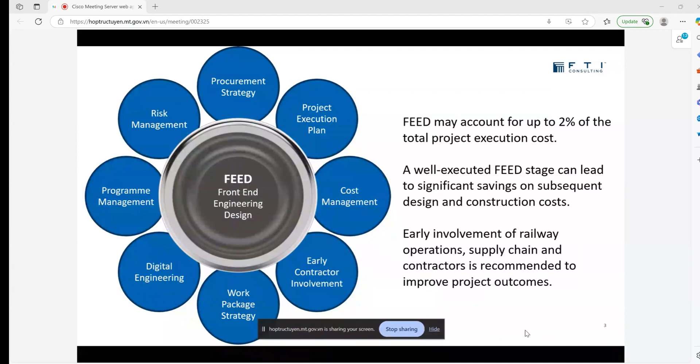One of the things I want to focus on in my presentation, apart from the early contractor involvement, the project planning, the cost management, is specifically digital engineering. And digital engineering, I think there are 4 things that you should be considering as part of FEED.

So under digital engineering, the most important thing you can consider at the beginning of the project is how you're going to collect the information to actually manage the facility and manage the railway in the future. Being able to understand and map out all of the asset information requirements, all of the facility management data, all of the operational data is going to be absolutely crucial.

So in the next 12 months, as part of FEED, this should be a priority for the authority to understand how we're going to manage digital engineering and how we're going to collect asset data throughout the life of the project, from design through construction and then handover to operations.

And what this looks like in very simple terms is that this process of establishing the asset information model begins at the beginning of the design process. So the data is collected throughout the design. Most of the data is collected during the construction phase, and all of that data needs to be gathered in a manner that can be handed over to the operator in the form of an asset information model.

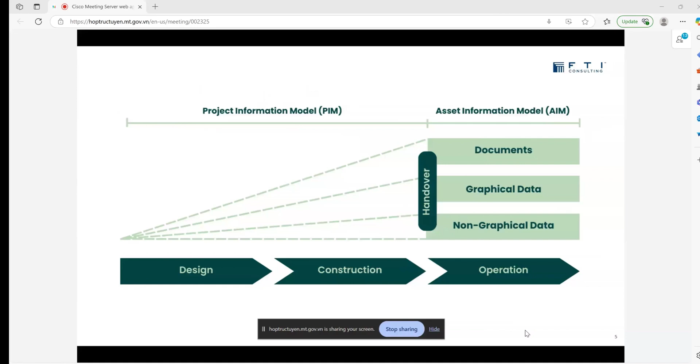So during the design and construction stage, you will hear people talking about BIM. Sometimes you hear them talking about PIM. You hear them talking about common data environments. These are all different ways of collecting information, but ultimately the operational information has to be collected by the high-speed rail authority. So one of the ways of doing this, and one of the things that needs to be considered as part of this process at FEED, is establishing a classification system for the data.

So in order to do that, you need to understand all of the different assets that are in your system. You've got your rolling stock, you've got your stations, you're going to have your tracks, you're going to have all the communication systems—many assets, thousands and thousands of assets. These must be classified and categorized so that you can actually find and manage the data. So one example I'm going to share with you is how we manage this for an underground metro project.

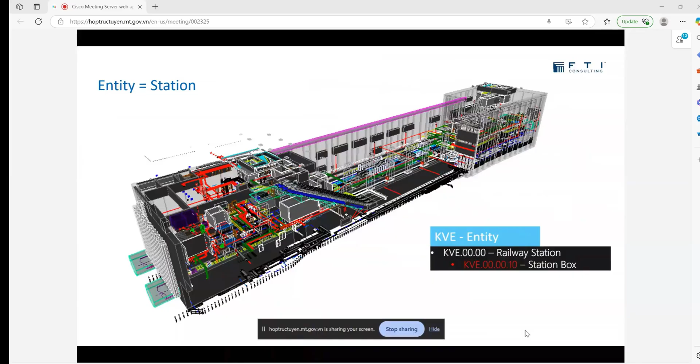The logic still applies to high-speed rail. You basically are going to have a number of entities—they could be stations, crossovers, bridges, tunnels—and each is going to be identified by a certain code. And then inside that entity, you're going to have spaces or volumes, and all of that information needs to be categorized and classified so that you can find assets based on their location.

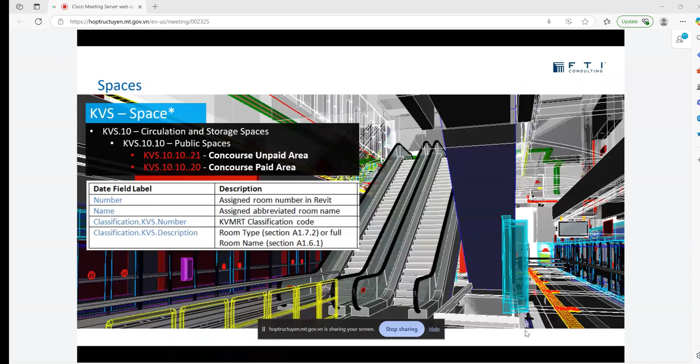Everything on a 1,500-kilometer railway will be based on location. So all the locations need to be defined, classified, and coded, and then you can start to understand where the assets are that you have to maintain and operate. And then inside those assets, or inside those buildings, you're going to find systems.

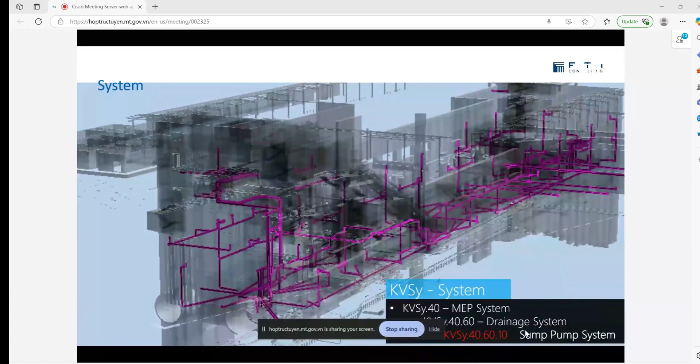You're going to have different types of systems - railway systems, building systems, drainage systems, fire systems. Each system is made up of many components, and inside those systems, those components are going to be labeled and created as products. It could be a fan, it could be a pump.

As part of the planning for the high-speed rail, it is absolutely essential that this data structure is planned out, and that is not left up to design consultants or contractors to figure it out as they go forward. It is absolutely critical that the owner defines all of these information requirements. We're quite happy to support you in developing those standards and requirements, but the owner is responsible for developing their operational requirements and making information mandatory for consultants and contractors to actually deliver. That's the first part of the puzzle - establishing the owner's information requirements for their asset management.

What you will all be familiar with is BIM, or you'll at least have heard the term BIM. For many of you, it may just be a 3D model. For many of us that have done it before, it's the backbone for all of the information that will be gathered. So we look at BIM across a number of different key constraints.

In order to get BIM correct on your projects, it is essential that the High Speed Rail Authority defines what they want from the BIM process. So we can make sure that designers and contractors are meeting your digital engineering requirements, and we can make sure that audits are completed, so we can actually develop a really good practical BIM roadmap. There are 5 key areas that need to be considered.

3D modeling is going to be the most important at the beginning, making sure that all of the alignments are modeled, all the bridges are modeled, all the crossovers are modeled, etc., etc.

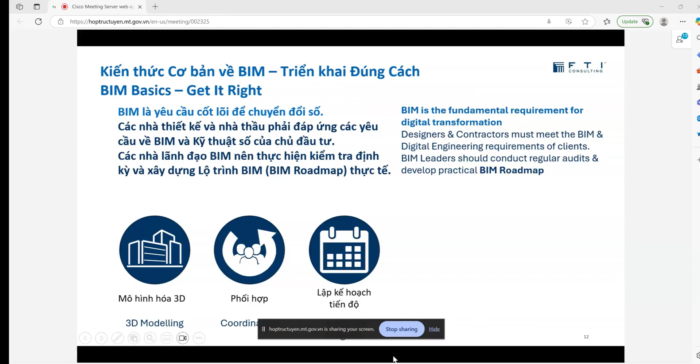You can then start to use the models for scheduling, and you can also use the models for quantification. By building good quality models and establishing the requirements that they'd be used for scheduling and quantities, you can start to manage the project, manage your costs, manage your planning, and manage your program. These are tasks that can be assigned to consultants or EPC contractors, but it is driven by the owner's requirements that the models are used and built upon all of this.

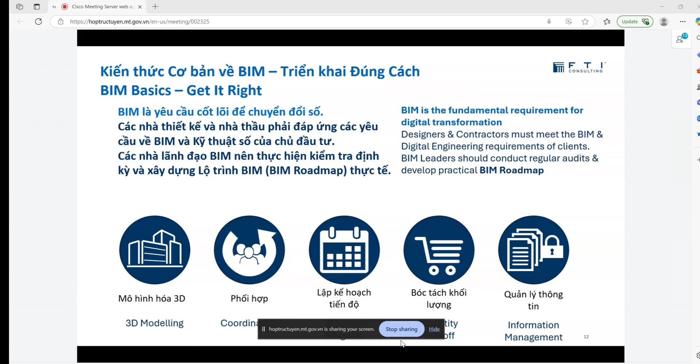Ultimately it comes down to information management. How do you collect the information that you're going to use to run your facility in the future? It's not just about the design and construction phase - it is also fundamentally about the data you're going to collect so you can actually run and manage the facility in the future.

During that FEED process, in order to come up with your BIM plan, you need to start considering who will be involved in the project team at different phases of the project - during the design phase, what skills, what talent, what capability is required during construction, during commissioning, during handover. All of the different phases of the projects need to be considered and to a certain extent planned out.

The roles and responsibilities need to be considered between the different teams - between the owner's team, the design team, the construction team, the supply chain, etc. Absolutely critical is setting up the communication, collaboration, and coordination procedures, and this can be supported with technology - common data environments, cloud solutions. The method by which information is shared is important.

The uses for BIM on the project can be defined - you can have a light touch or a very substantial touch. There are a number of really, really good examples of how BIM is being used for high-speed rail. HS2 has had some success stories. We had a good HSR project in Malaysia, which had good requirements for BIM. So there are a number of existing documents that clearly specify how BIM can be used, and above all else, the authority can lean on and start to apply international standards.

There are good standards around ISO 19650 for information standards and asset management, and many guidelines are available. So the information is available, and it's up to the authority to follow it through. A couple of lessons learned from the projects, and what you can expect going forward.

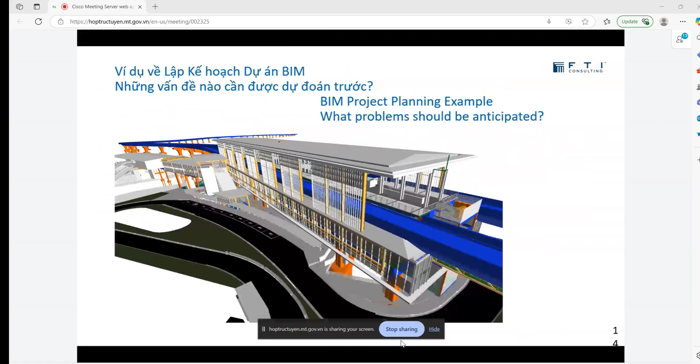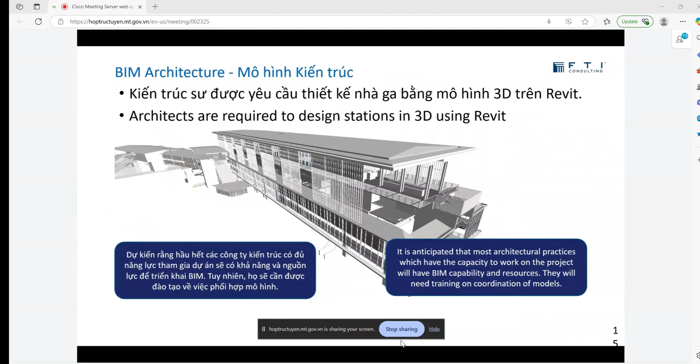This is an elevated train system we worked on in Malaysia. You can assume the architects will be able to work in 3D—it's not unusual for architects to work in 3D anyway. So they'll have the ability to do the models, but they won't be experienced in coordinating train or railway systems, and not many architects have worked on high-speed rail. So the architects will require training and support when it comes to coordination, particularly with the engineering teams.

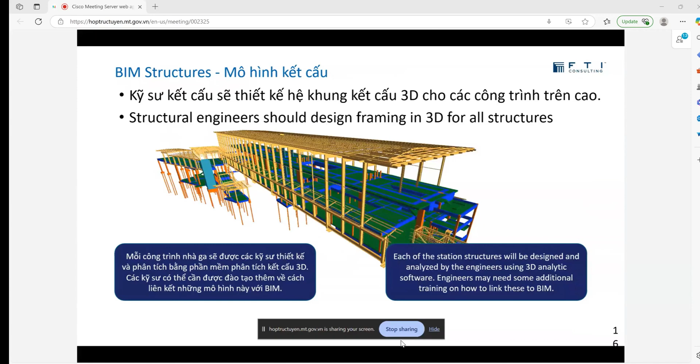When you get to the engineering teams, again, it's normal for engineers to work in 3D, so you can expect a good quality of service from the structural engineers—less so from the civil engineers. So when you actually get to doing the viaduct layouts, the embankments, the bridges, you're going to need to provide a bit more support and a bit more training.

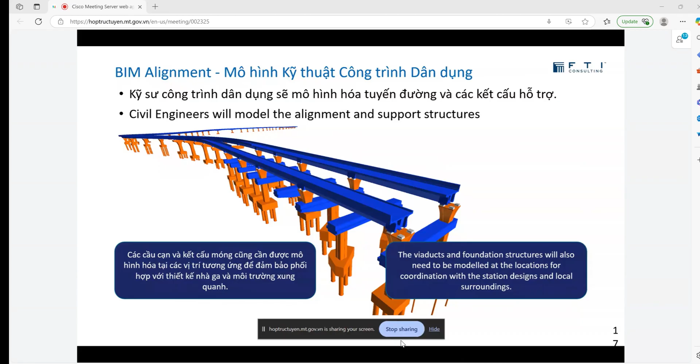The way this has been done on projects globally is they've established academies where they've trained up the local engineers and local staff to use these tools. We can help you with mapping out the academy. It's a small investment with a huge return—by upskilling the industry, you can start to get value from the process.

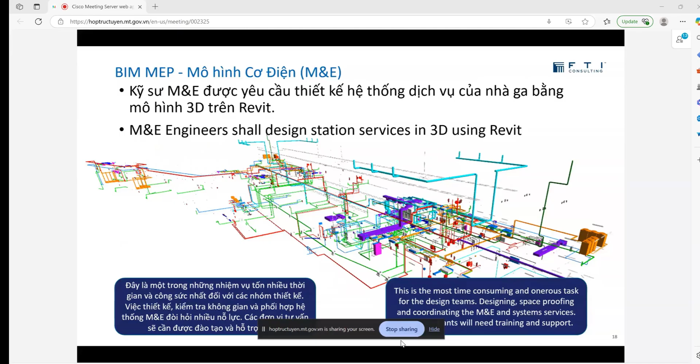The biggest challenge on all of these projects will be the systems—railway systems, mechanical systems, electrical systems. They involve a lot of complexity and coordination. This is where most of the effort will be required in actually resolving and sorting out coordination issues. Once you start to put all these systems together, you can expect to identify coordination issues, buildability issues, cost issues. So relying on the models as a means for planning and assessing the project is going to be absolutely crucial.

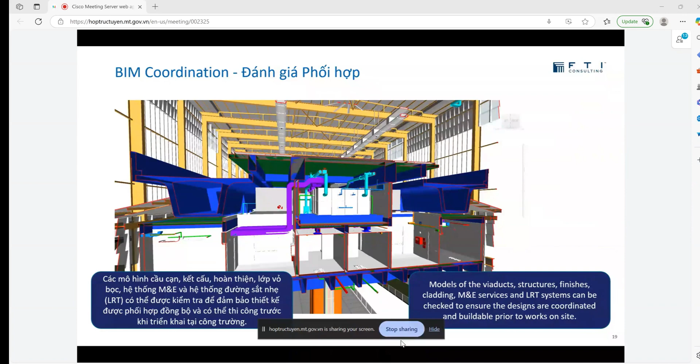We would urge that a railway team actually get familiar with using these tools to review the designs.

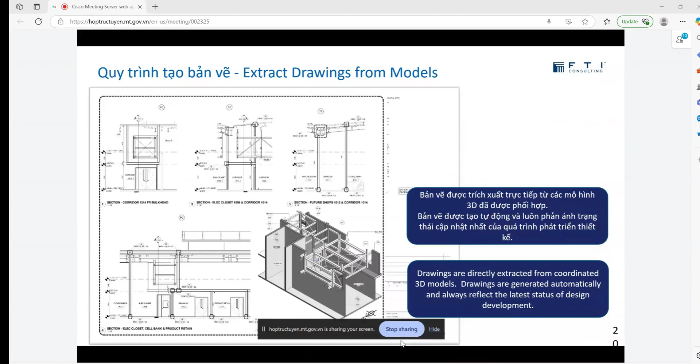Above the modeling situation, one of the key things that needs to be considered is the delivery of drawings. For example, on projects like HS2, Crossrail, and MRT2 in Malaysia, the drawings were mandated to come from the models. In order to drive this process, it is essential that the owner specifies how the drawings are being produced.

So the third pillar in this digital engineering strategy—and this is probably going to be more beneficial than BIM at the beginning of the process, particularly during FEED—is a geographical information system. We would urge you to look at the entire alignment at a macro level, kilometer by kilometer, and then go all the way down into micro level, meter by meter. To do this, you need this geographical information system.

A GIS system can incorporate huge amounts of information in a very easy to access format. So you can have all of your 2D data in the GIS platform. It's all location-based data, so you can see the alignment, the station locations, the allocation of land acquisition, and the existing land boundaries if those are available. Then you can provide that information across the web.

So teams working across this project, whether in Hanoi, Ho Chi Minh, or overseas, can all have access to the same information at the same time, and they're not relying on sharing CAD files and information. So the GIS information is going to be the backbone of this project, and it needs to be established as soon as possible.

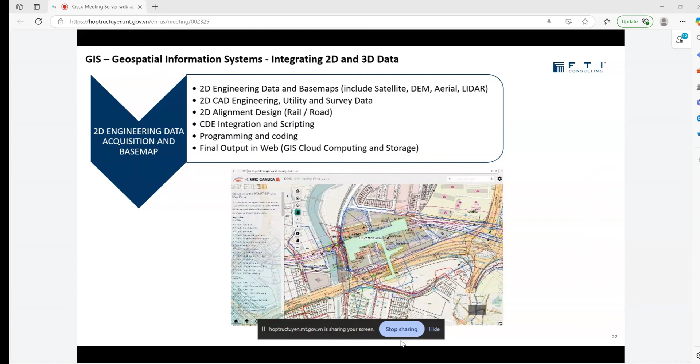In addition to 2D information, as the models are developed and the alignments are developed, they can all be included into this system. So you can actually include the 3D information for this project.

Again, we've done this on projects in Malaysia—we had planned this for the high-speed rail project.

Someone's making noise in the background.

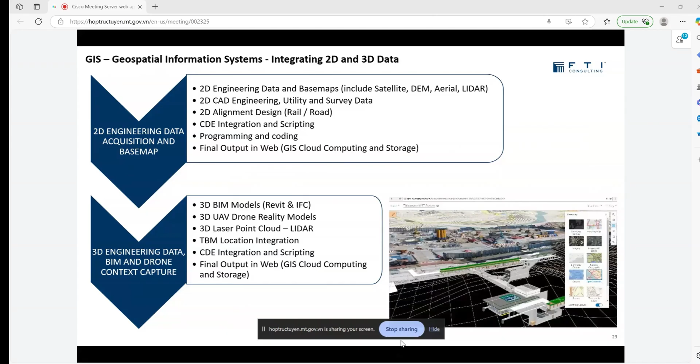We have also managed to use this, and we've seen examples of it being used on the high-speed rail project in the UK, and on the high-speed rail project in California. Being able to use the 3D models, and then also what I'm going to show you in a minute—reality capture—is a key part of GIS.

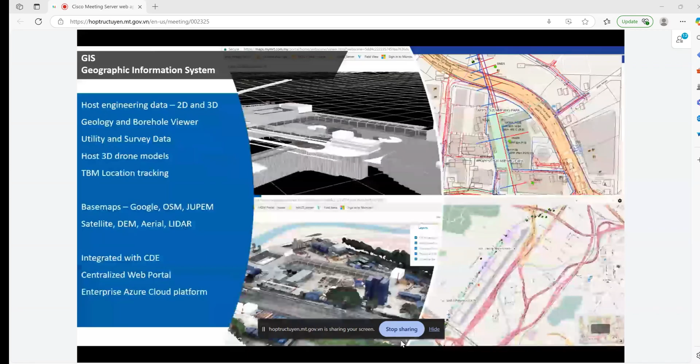So the GIS, you can include utility information if it's available, TBMs if you've got tunneling machines, information from drones, and data around population density, et cetera. So GIS is a really powerful way of managing a project, especially during the FEED stage.

And then the final pillar is reality capture. Reality capture is basically a process by which you digitize the existing environment. So you would survey the alignment through Ho Chi Minh, you would survey the alignment through...

Hang on, who will—can you make sure you're muted if somebody's not muted? I hear keyboard clicking.

Sorry about that. So reality capture is a key part of delivering these projects. What I mean is you can take the real world and digitize it. Where you have an alignment, where you have an existing facility, you can digitize that, and then use the digital model linked to the real world model to start working on your design and design layouts. There are a number of ways of doing this.

I'm not going to go into detail today, we can follow up if somebody would like more. You can use laser scanning for high density point clouds for high accuracy. This is important if you're trying to make sure you've got headrooms for railway corridors under existing structures.

If you don't need the accuracy, you can use drones. Drones can be, in this example, propellers, or they can be fixed wings. Fixed wings will be more useful given the length of the alignment, so you can capture a lot more information. And then as the project's progressing, we'd recommend using 360 cameras to monitor the project, so you can record it as it goes along.

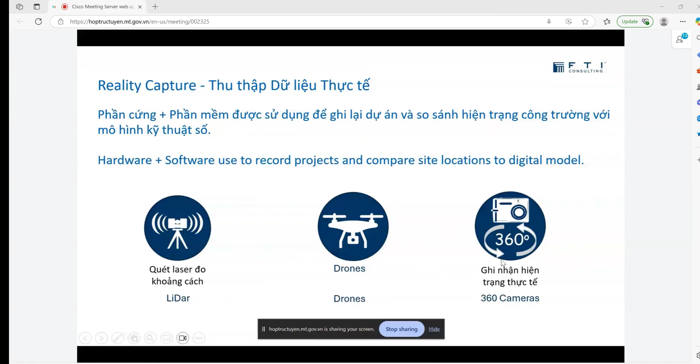All of these technologies—the lasers, the drones, the 360 cameras—create the reality capture meshes or reality capture models that you can then use as part of your design, engineering, and coordination process. So again, it's an important part of the puzzle.

So in terms of how we can support you going forward, we can help you with advice on which technology to use, and help you develop your strategic documentation. We can help you develop your specifications, and keep you advised on what the new technology is going to be, whether it's virtual reality, augmented reality...

...whether it's reality capture. We can also support you with data analytics, and help you understand how these are going to transform the construction industry over the next 8, 10, 15 years through the life of the project.

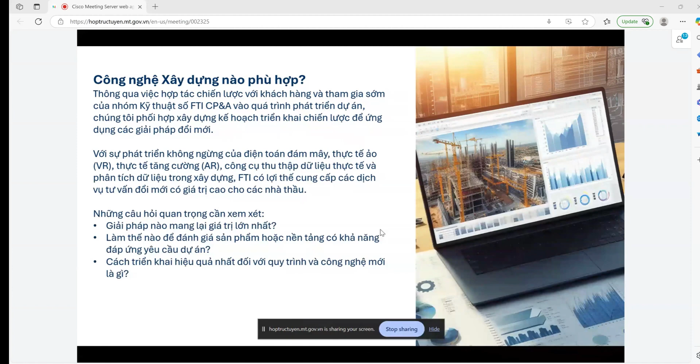So our process is to work through a rigor of identifying which solutions are actually of most value to you as the owner, and which solutions you can mandate the design team and construction team to use. We can help you assess different platforms, different solutions, and give you advice on how to actually deploy them. And then, when it comes to BIM, we can help you define what the requirements are.

So we can help you set out the BIM requirements, your employer information requirements, and identify all the BIM best practices. For example, establishing a BIM academy.

And as the project progresses, we can support you with checking what's going on, providing analysis of information being provided by the consultants and developed by the contractors. And we can work with you through the process of appointing the EPC contractors, making sure they and their supply chain can meet the requirements.

So there are ways of assessing the capabilities, capacities, and experience of the different EPC contractors to make sure they understand your requirements and can deliver your projects. So that's it in a very quick summary. I believe digital engineering is an absolute fundamental requirement for high-speed rail.